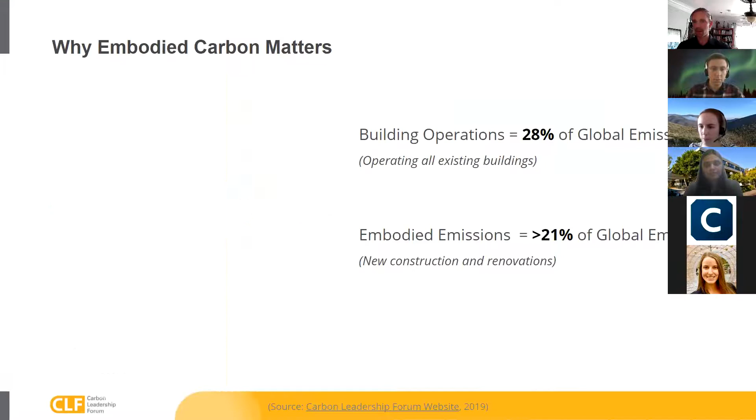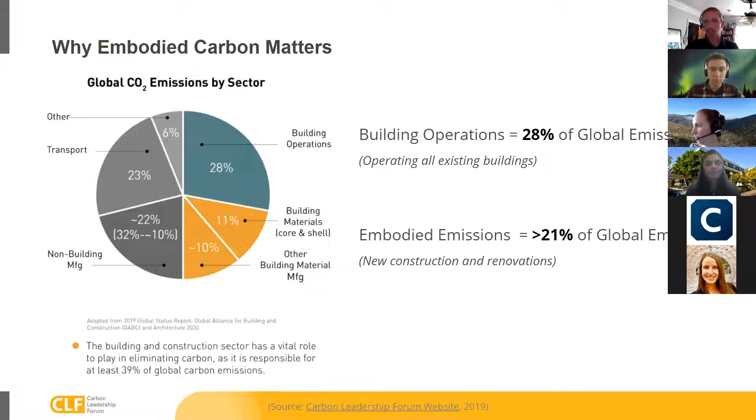So we also always want to start, just in case it's still a pretty new topic, with the 60-second elevator pitch of what embodied carbon is and why it's important. Why it's important is buildings are the number one contributor to global greenhouse gas emissions. A lot of attention has been paid to the efficiency of MEP systems and heating and ventilating those spaces, but just recently there's been a lot more attention given to the actual manufacturing of materials and those impacts, known as embodied carbon. It's the rest of the life cycle of the material, because of its significant impact to the environment as well. That's just the very high level background. Lots more content on our website, clfla.org, if you are interested in learning more and need some more background content.

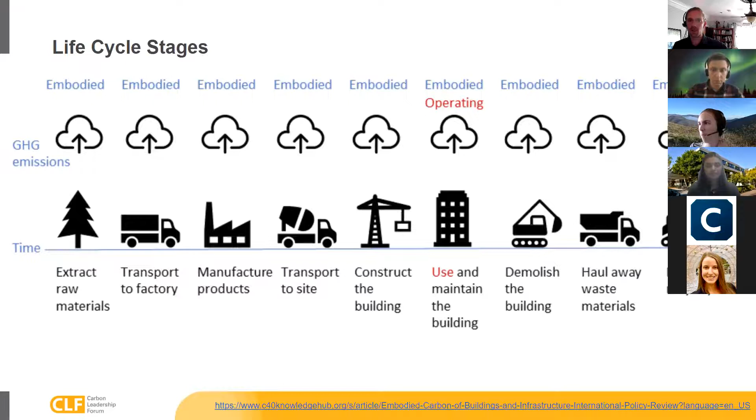But we want to give most of the evening here to our two presenters that we're really excited to hear from. Both are going to give about 20-25 minute presentations, and then we'll have time to discuss as a group this very exciting research. First up is Rushita. Rushita just finished her master's at USC. She was studying mass timber and early life cycle assessment. I think we originally got connected through Sanjeev, who I think I saw on the call - hopefully, shout out to him, thank you for connecting us. It's really exciting research, and I'm looking forward to hearing more. So Rushita, the floor is all yours. Sure, I'll share my screen.

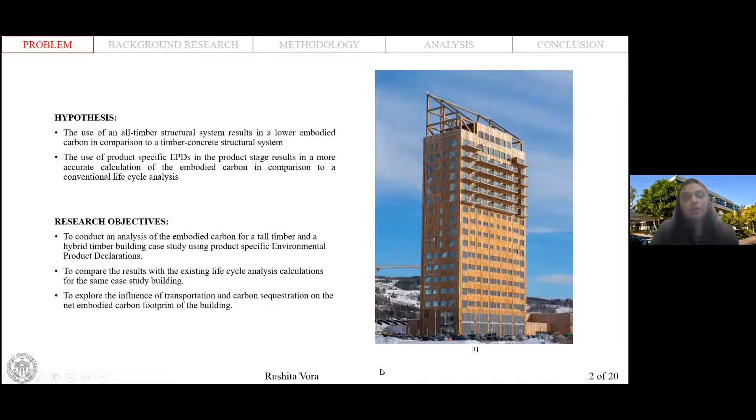Wood is processed to create engineered timber, and different processes yield different products. This research focused mainly on the use of glulam and cross-laminated timber and their impacts on the embodied carbon footprint of the building.

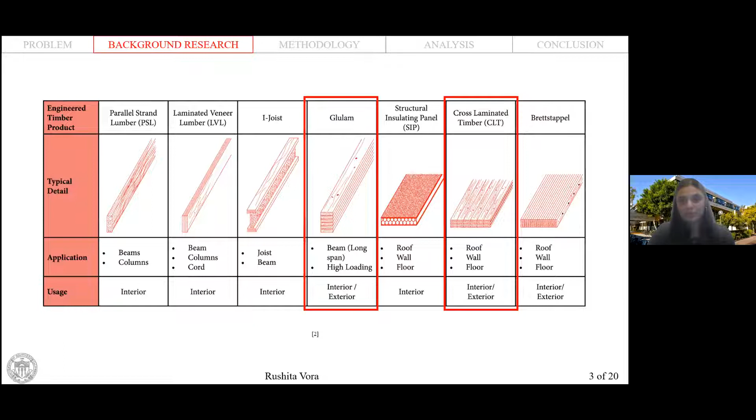Talking about structures of a building, it is very important to decarbonize them because they are one of the highest contributors to the net embodied carbon footprint of the building. And so the availability of mass timber made it possible to build tall structures out of wood.

A timber structural system can be broadly classified into two categories. An all timber structural system is one wherein timber is used to resist both the lateral as well as the vertical loads. Whereas a hybrid or a composite system is one wherein another material like a concrete core is used for the lateral loads and timber is used for the gravity loads.

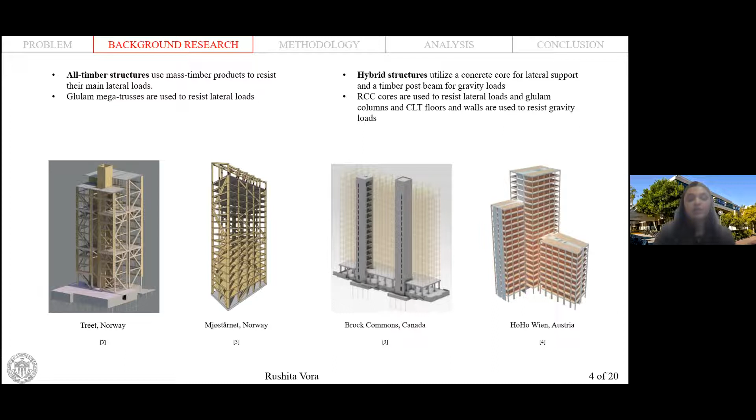Now, to be able to reduce the embodied carbon of a building, it is important that it be assessed accurately first. So the impact of a building all throughout its life cycle is assessed using a life cycle assessment. This is classified into 5 stages depending on the stage of construction that you're addressing. Of all these 5 stages, the first stage, that is the product stage or the cradle to gate stage, has the highest impact on the embodied carbon footprint of the building.

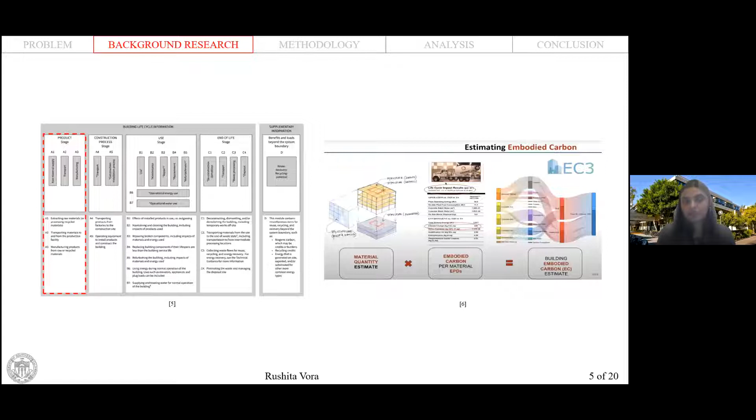And so the tool that I used, which is the embodied carbon in construction calculator or the EC3 tool, supplements the LCA process by addressing this stage of the entire process.

Now, moving on to my methodology, it comprised of 4 main steps. The first step was to build a building information model of the case studies. Material quantities from these models was then taken into the EC3 tool, wherein the materials were allotted EPDs, after which an embodied carbon analysis was carried out.

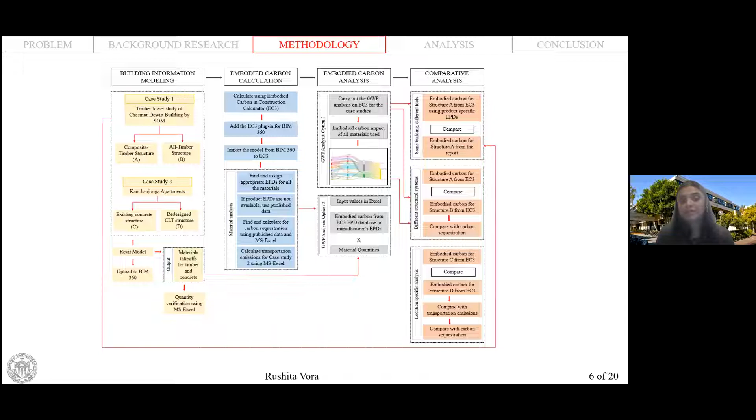And the final step was to compare and analyze different scenarios and different case studies to understand which structural system has a higher impact and which variables impact the carbon footprint of a building.

So the research used 2 case studies. The first case study was the timber tower study of the DeWitt Chestnut Apartments. This building is an existing concrete structure in Chicago. As part of research by SOM, they redesigned it using mass timber products and derived a composite timber and an all timber structural system. This case study was used for 2 assessments.

So the first analysis was done to understand how the use of the EC3 tool impacts the calculations for embodied carbon. And this was done by comparing the published embodied carbon results for the composite timber structure with those derived using the EC3 tool for the same structure.

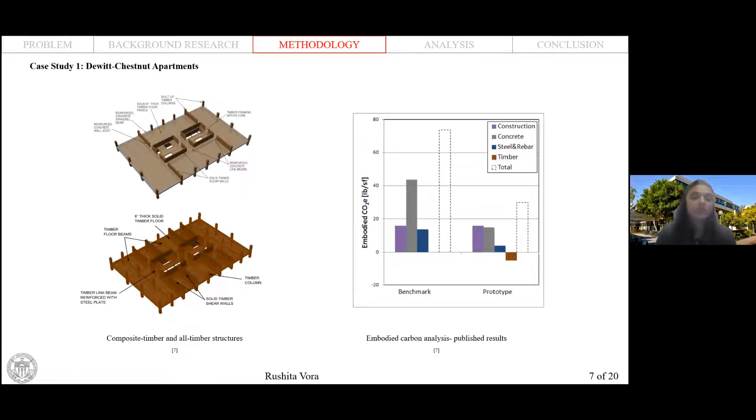The second analysis was to compare and analyze the embodied carbon footprint of the composite timber and the all timber structural system. The second case study used was a location specific case study. By this, I mean that the location of the building and the location of the manufacturing units of the materials was known for this case study.

Now, this case study was important because timber as an industry is not global yet. And it is highly probable that to be able to build with timber in certain parts of the world, it may have to be transported from another country. So it becomes important to understand how transporting timber these long distances impacts the carbon footprint of the building and whether it still makes sense to use it as a construction material.

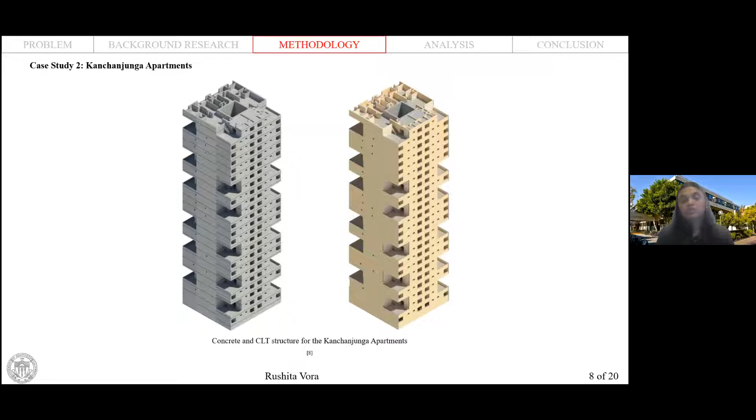So the case study here is the Kanchanjunga apartment. This again is an existing concrete structure located in Mumbai, India. This was redesigned using CLT as part of a conference in India. So the location of the building is in India, whereas the location of the manufacturing unit for CLT is all the way in Japan. So moving on to the analysis, the first analysis was to see how the use of the EC3 tool impacts embodied carbon calculations.

The first step for the entire research was to build a building information model using Revit, which was done using published data. To ensure the calculations and comparisons carried out were accurate, the accuracy of the Revit model had to be verified first.

This was done by comparing the material quantities derived from the Revit model with those published in the report. A small discrepancy was noted in the concrete quantity, wherein the concrete was almost 24% higher in the Revit model. This was attributed to the fact that the concrete sections in the Revit model did not have RCC modeled into them due to lack of available data, which increased the overall volume of concrete.

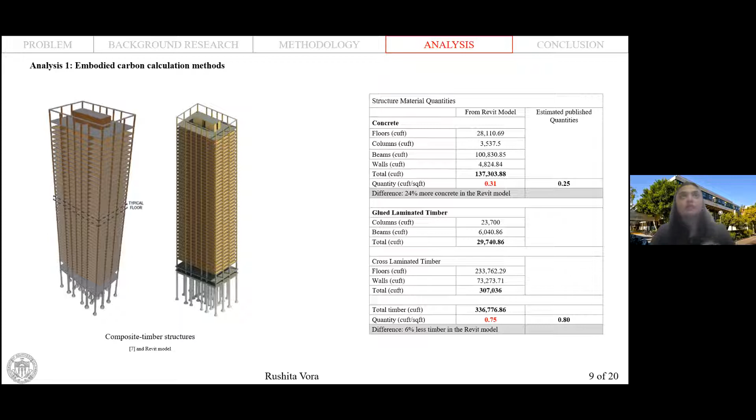This difference in material quantity led me to my next step, which was to understand how a difference in the material quantities for the same structure impacts calculations on the EC3 tool.

This assessment basically highlights that the EC3 tool can be used for early stage assessments where you do not have very accurate material quantity information. However, the ideal use for the tool would be when precise quantities are known.

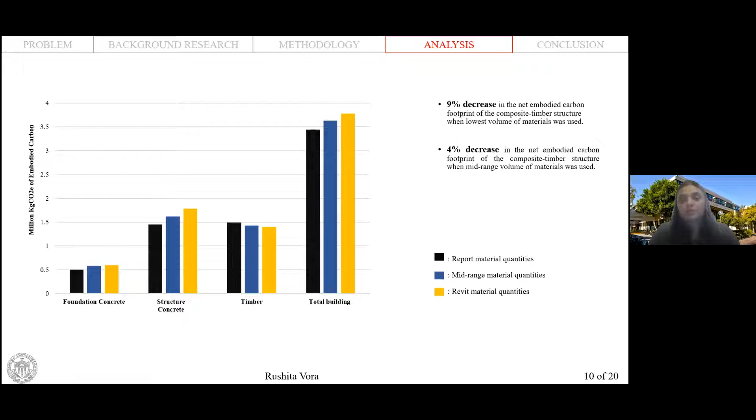The next step was to see how the EC3 tool impacts the calculations of embodied carbon. The EC3 tool uses product-specific EPDs, environmental product declarations, for calculating embodied carbon, whereas the published results used industry averages for calculating embodied carbon.

So to see how these EPDs performed against the industry average, a range of EPDs was considered on the EC3 tool and the calculations were carried out for all these EPDs.

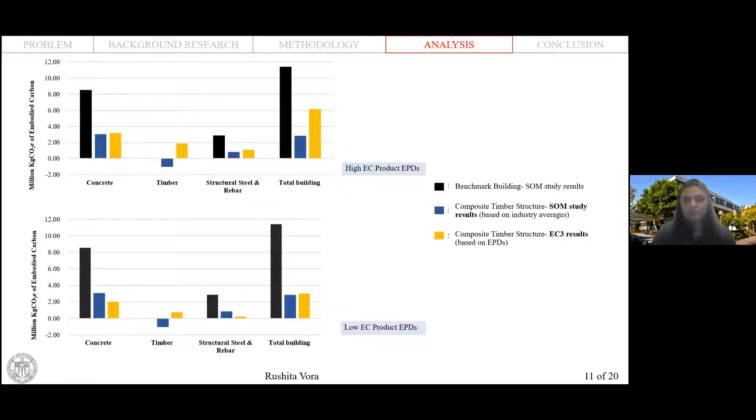So the next step was to see how the timber would perform had the carbon sequestered not been accounted for. For this assessment, two different carbon sequestration values were considered: one wherein the end of life treatment emissions were accounted for, and one where they were not.

When you use two different carbon sequestration values, the end results are distinctly different. This assessment again highlights that in the absence of information about the end of life treatment emissions and carbon sequestration, the use of a more conservative tool like the EC3 tool avoids misleading and inaccurate calculations.

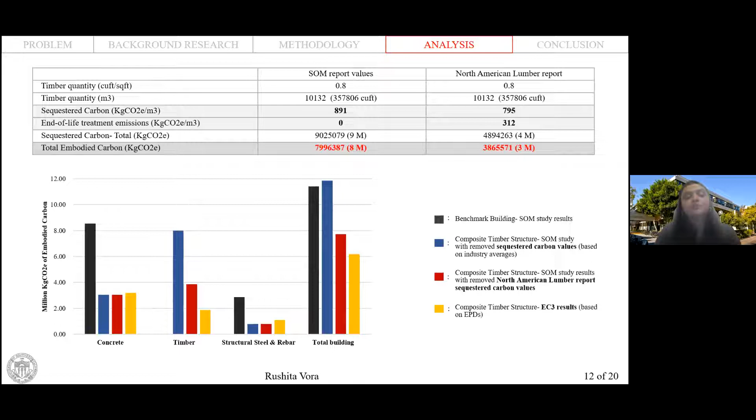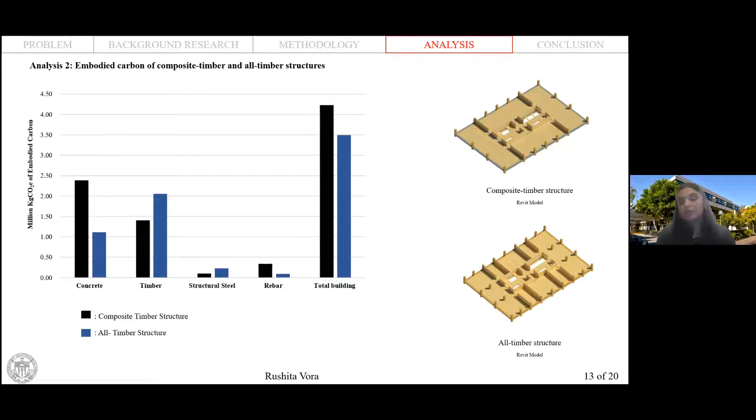When you start accounting for the carbon that is sequestered by wood, the carbon footprint of the building changes dramatically. Both structures now have a net negative embodied carbon footprint, meaning they remove more carbon from the environment than they release into it. Furthermore, it also changes how timber contributes towards the net carbon footprint of the building.

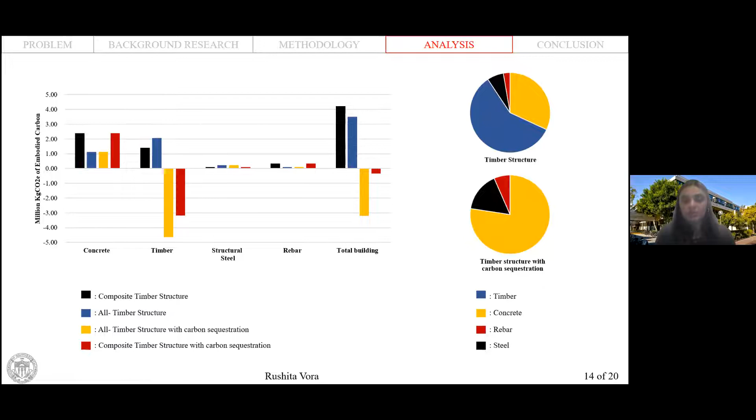So this assessment highlights the importance of carbon sequestration, which further highlights the importance of sustainable forestry practices, so as to avoid carbon sink deficits, to use the ability of wood to sequester carbon, and justify the use of timber as a sustainable material.

The last analysis was for the location-specific case, where the building was in Mumbai, India, and the location of the CLT manufacturing unit was all the way in Japan. The first assessment for this analysis was done assuming that the location of the building and the location of the manufacturing unit is the same.

For this analysis, two different values of embodied carbon were used for the CLT. This is because the CLT to be used would be manufactured in and transported from Japan. So a value matching the embodied carbon of timber manufactured in Japan, based on their LCA studies, had to be found. However, a close enough value could not be found on the EC3 tool, and as a result, two different values were considered to carry out the calculations.

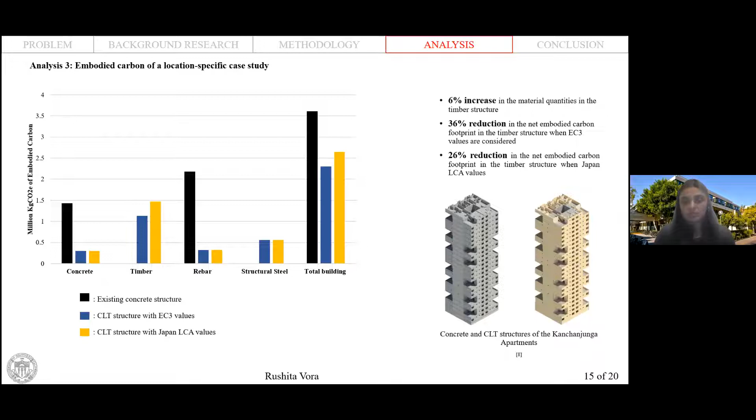For either of the cases, the CLT structure has a lower embodied carbon footprint than the existing concrete structure, even in the scenario where you do not account for carbon sequestration. This assessment, however, highlights a limitation of the EC3 tool and its limited database, and how it limits its use when EPDs of products not sourced within its database need to be used.

The carbon footprint increases by almost 36%, which is a significant increase from what it would have been had it been sourced locally. However, despite this increase, the carbon footprint of the building still performs better than the concrete structure, which was built using locally sourced but conventional materials.

So this assessment highlights the importance of including transportation emissions, as they do have a significant impact on the embodied carbon footprint of the building. Furthermore, it also shows that for this particular case study—where the building is in Mumbai, India, and the manufacturing unit is in Japan—it does make sense to build the structure out of timber and continue to have a lower carbon footprint.

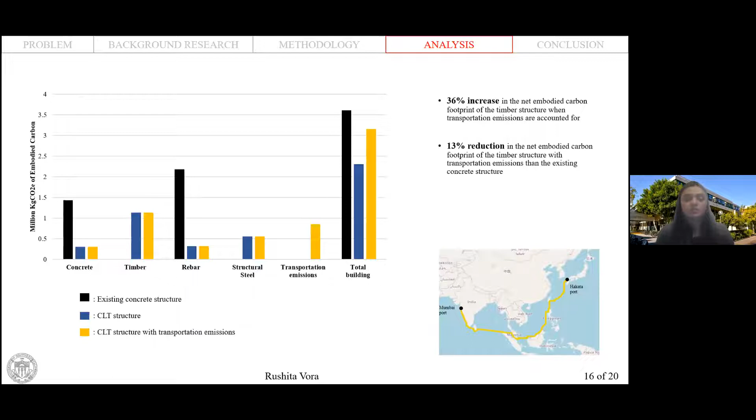But this is a very location-specific case study and analysis, and would change with a change in the location of the building, the location of the manufacturing units, and the mode of transportation. So basically, this assessment should be carried out for every analysis or every building that uses timber that is not locally sourced. The last assessment was done to include carbon sequestration, because Japan has laws and policies in place to ensure sustainable forestry practices.

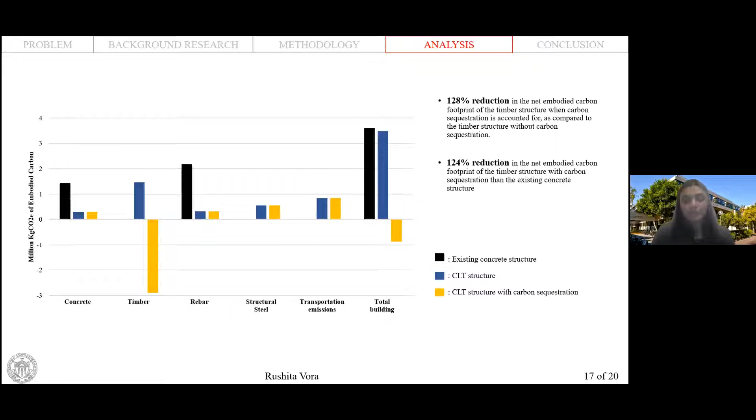So to conclude, the EC3 tool does provide a more accurate value as it uses manufacturer EPDs rather than industry averages. It does not account for transportation emissions and carbon sequestration, but provides a conservative analysis when accurate information about forestry practices and end-of-life treatment emissions is not known.

Between the composite timber and the all timber structure, the all timber structure performed better in terms of its embodied carbon footprint, even when carbon sequestration was not accounted for. When carbon sequestration was accounted for, the structure started to have a net negative embodied carbon footprint, meaning they removed more carbon from the environment than released into it. The inclusion of carbon sequestration is important, which further focuses on the importance of sustainable forestry practices.

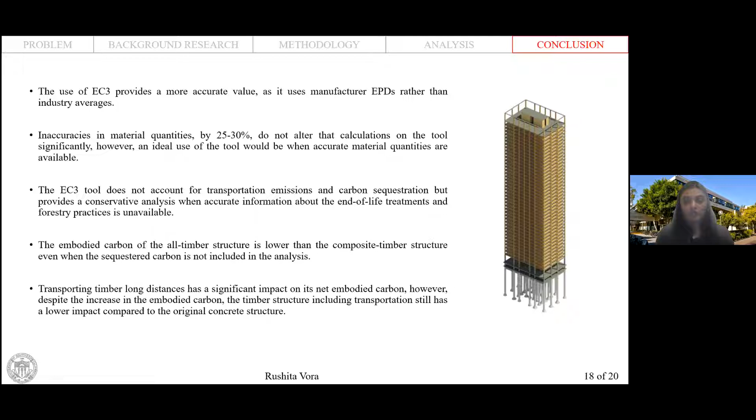Lastly, transporting timber long distances does have a significant impact on the net embodied carbon footprint of the building. However, in this particular case study, transporting the timber still made the CLT structure have a lower carbon footprint compared to the concrete structure. But again, to reiterate, this is a location-specific case study, and the analysis would change with the change in location of the building, the manufacturing units, and the modes of transportation. That's about it. Thank you.

That was really great. Thanks so much, Rushita. No problem, yeah, lots to dive into there. I think it really speaks to the importance, especially on the life cycle assessment stuff, of where we draw our boundaries and what we're considering. Thank you for beginning the conversation there. Lots of questions, but we'll leave it till later. Okay, I'm just going to stop sharing my screen now.

Perfect, we'll transition to Rahul. And while Rahul's getting started here, I'll give him a very brief introduction. He's going to be presenting on some research coming out of UCLA about a different kind of sequestration, dissimilar from the timber growing carbon. This is some really interesting research coming out about sequestering carbon into concrete, and congratulations to you, Rahul, as well, because you and your team recently won the X Prize for this challenge too. So really excited to hear you speak to it and learn more about it.

Awesome, yeah, thanks. Good afternoon, everyone. Thanks for the invitation. We've been looking forward to engaging with Carbon Leadership Forum for some time, so it's great to kick that off with our home chapter. I'm going to approach this less from the academic sense. We've now spun the effort out into a private company, so hopefully you don't mind getting the sort of pitch from that angle. But either way, you'll hopefully get a better sense for what we're doing, and hope this is the start of many discussions. So let me just make sure everyone can see the screen. All right, perfect, got it.

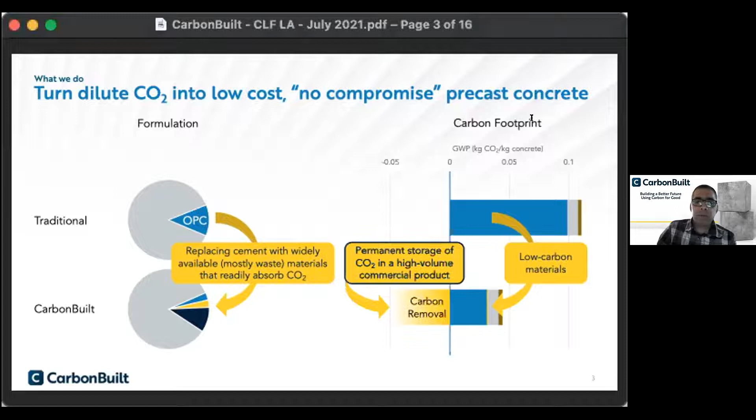Let me show you how this works in practice. I'm going to do this using a concrete block plant as an illustration of the process. Where I mentioned precast, the technology is broadly applicable to most of the precast market. We're starting in masonry and concrete block in particular.

Just a level set here: concrete blocks, like most precast products, are produced by taking mostly sand with some rock and Portland cement, mixing those together, forming them in molds and compacting them. Then those products are moved into curing chambers where the hydration of Portland cement, the core set of reactions taking place, is accelerated through high temperature and humidity.

In some cases, producers have started to add fly ash or slag to their mix. That was done historically to reduce cost, but today it also reduces carbon footprint. In this case, the calcium hydroxide evolved in the hydration of Portland cement is further reacted with fly ash, for example, to make more of the CSH glue that is really the core piece of the binder in concrete.

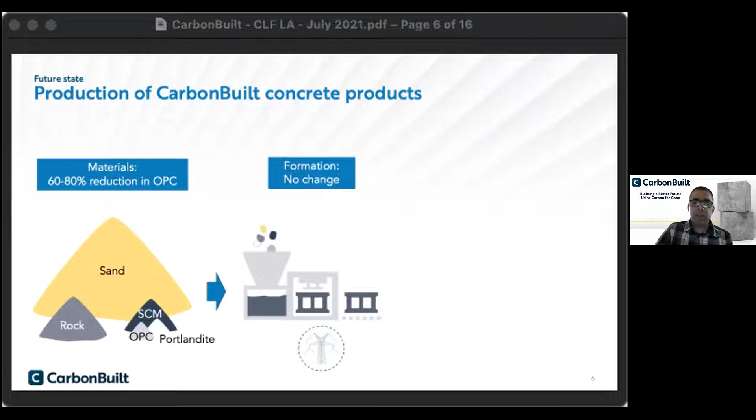So that's the change on the material side of things. The second step of the process doesn't change at all. We're producing blocks the same way—mixing, formation, and compaction all happen identically using the same processes.

But the second change in the process is on the back end, where we're curing not just with steam, but also with CO2. The steam curing here is a shortened cycle—we have less Portland cement in the mix, so we need less steam to get the hydration going. But following the hydration with steam, we're curing with CO2. As I said, there are three differences relative to what others have tried before that make our process low cost.

The first is that we can use dilute CO2, so we don't need concentration or purification. Ideally, we're using flue gas from any number of sources, including biomass. Eventually, the plan is to get that CO2 from direct air capture. Because our process can use dilute CO2, we can bring down the cost of direct air capture for some technologies, relative to the requirement for concentrated CO2. Beyond the concentration, importantly, we can do this at ambient pressure and low temperature, which means this process of CO2 curing can be added at low cost.

Let me make a couple of comments about the chemistry of what we're doing. Instead of one or two curing chemistries, as you'd have with Portland cement, maybe with fly ash, when you add our technology in, you have three different chemistries happening in the curing process. You still have cement hydration—this is happening over hours and days, so you have early strength starting immediately during curing, but there's strength that evolves over a month. In addition to the CSH products, which are the main products of hydrating cement, you also get lots of calcium hydroxide—this is the evolved Portlandite in the hydration process.

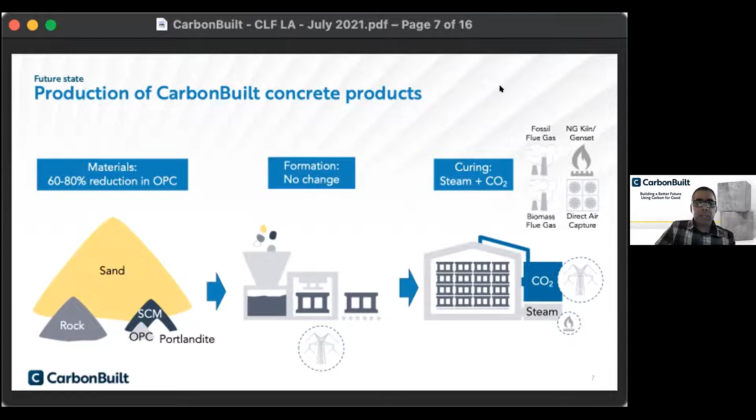As I mentioned at the start, the company is born out of research at UCLA's Institute for Carbon Management. For the first four years of work, this was classic academic research. In 2018, the team was fortunate to secure funding from the Department of Energy to scale the process up and run some pilot demonstrations at a couple of test facilities.

The first one of those occurred last summer at a coal plant in Wyoming, where we cured 10,000 concrete blocks using the flue gas from a coal plant. Earlier this year, we moved that equipment to Alabama, and we were able to produce another 5,000 blocks using flue gas from both a natural gas plant and a coal plant.

Through that process, we were able to not only demonstrate the process at scale, but develop a system design for a fully commercial plant. We had third parties conduct economic analyses and life cycle analysis. This was also the finals for the X Prize competition, and after five years of work, it was a great way to end that journey with that victory.

So that's kind of put us in the position we're in now, which is to start commercialization on concrete block. I'll show you some pictures of those demonstrations in a second.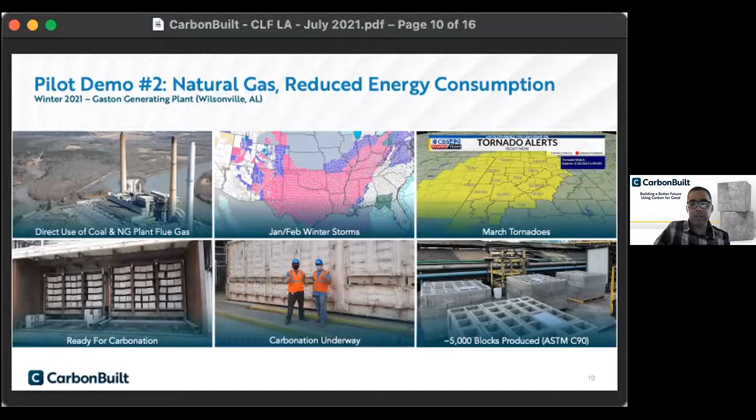Let me say a little bit about what no compromise performance means. It's been really important for our team from the beginning to deliver a concrete block product that isn't different from a performance standpoint. The specification here that matters is ASTM C90, and we've had testing performed by multiple labs, both at the National Concrete Masonry Association and Master Builders construction chemicals, on core attributes like compressive strength, water absorption, dimensional accuracy, and our ability to tailor weight and density to produce a similar product to what folks are making today.

Beyond that, we've also gone through the process of putting together acceptance criteria and draft code compliance reports with ICC-ES, the International Code Council organization. We've also had lots of additional testing performed by NCMA on other attributes that are important as these products move out into the field.

From an appearance standpoint, we could use the same admixtures that are used today for efflorescence control, for when these blocks are used in more architectural settings. The color of the product is very similar, and like regular concrete, it can be a little lighter or darker depending on the exact components going in. We've got some testing yet to be completed around thermal properties and fire resistance, but given that the aggregate types and fractions remain the same, from a chemistry standpoint we have no reason to be concerned about these tests.

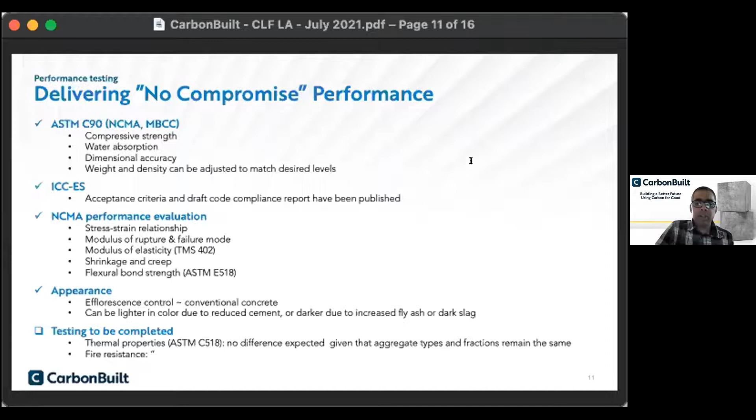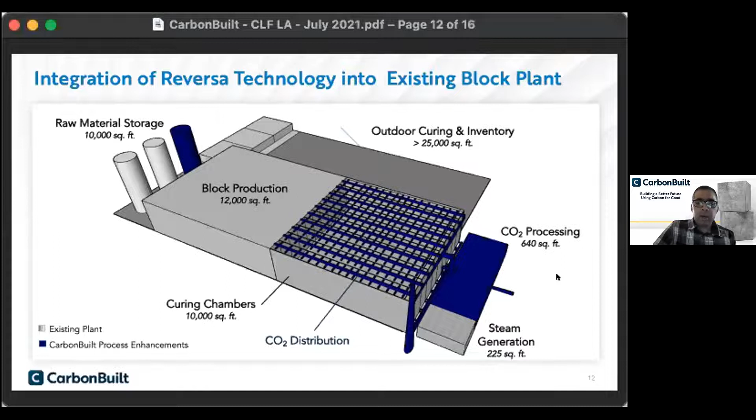I want to talk a little bit about our business model. I'm sure in this forum we end up talking a lot about sustainability, and I'm happy to share life cycle analysis at a later date. But one of the challenges in building materials more broadly has been how do we get conservative industries to adopt products. Important for us has been this notion of not wanting to go job by job, block by block - that's a really hard way to get scale.

Given this, the importance of low cost and substantial improvements in sustainability come in. Our basic model is to make this a really attractive financial opportunity for concrete producers, because we believe that's actually the way to make this scale - deliver to users a product that, from their perspective, is indistinguishable, but makes more money for the producer. If we can do that, this is how we get to ubiquity. So how we do that is threefold - there's three aspects to our value proposition.

The first comes from the fact that we're using lower cost materials. Precast concrete in general has a cost structure heavily dominated by raw materials. If you can make a 10 to 20% reduction in raw materials cost, driven by this reduction in cement, you can reduce the overall cost of the product, and that alone is enough to deliver a strong return on the initial capital investment.

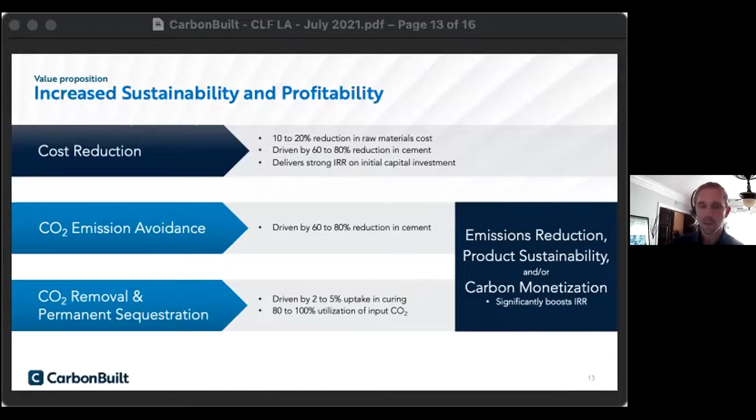Okay, Q&A, would love to. Oh yeah, Laura, do you have anything you want to contribute? I have one question from the chat that was direct messaged to me and not to the whole group. Jill would like to know, Jill's very excited about Rahul's presentation, and would like to know when she can spec it for her next project.

Thanks, Jill. As I noted, we can't spec anything until we have a producer that's making products, so we'll be working from the production end forward. I guess I would ask, as soon as we've got something in Southern California, I would say this group will be the first to know.

Awesome, so if anyone else has questions, you can definitely drop them into the chat. I'll contribute my own question, which is that I noticed you said you're using fly ash in the product, and that you are also using flue gases from coal and natural gas plants. So what happens when we stop burning fossil fuels?

Yeah, it's an awesome question. I'll say a couple things here. I think historically, the technology development, some of the motivation behind it, certainly some of the funding behind it, was coming out of how do we do integration with coal, heavy industry. Frankly, it was before the trajectory for coal was as obvious as it is now, which is good.